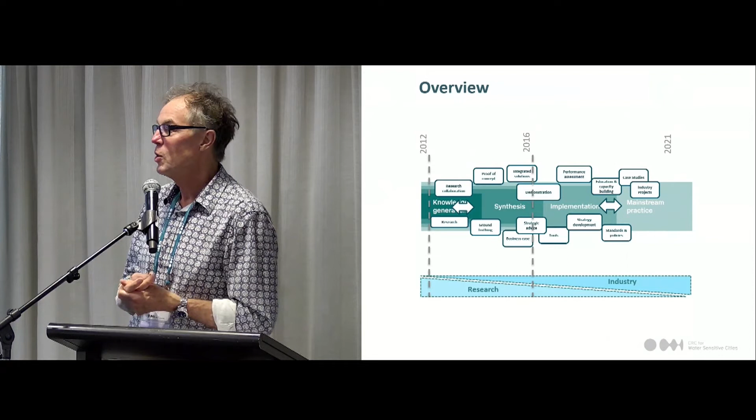There's also a whole bunch of others I won't go into in detail, but I'll just briefly mention them so you get a feel for the things you're not hearing about today. We did some work for Queensland Reconstruction Authority with a synthesis report called Ideas for Catalysing Flood Resilience, done in conjunction with James Davidson. There were two outputs from that: this report with ideas about how we catalyse flood resilience, and also the guidelines that James produced for how you build flood resilience into residential houses. Some tremendous work there.

The ideas work needs to be taken further forward, and that's part of what Pete's doing now with the flood community of practice and other forums. And of course that work of James Davidson has been bedded into a lot of what Brisbane City Council does now, but also in other jurisdictions. So a great piece of work.

We did a review of how well bio-retention filters are working. There were a few myths floating around about that, with some contrary opinions. I think we've answered the questions that were being thrown up there and given us confidence in that technology and in the continuing use of bio-retention filters. So that was a great piece of work. I was really pleased to chair a panel of some great people who helped with that.

We worked with Urban Utilities and Brisbane City Council on risk-based planning, all around how we manage wet weather sewage overflows. Again, a tremendous piece of work, and I'm pleased to hear that that's being taken forward by both those organisations.

We worked hard, I think with the Queensland Regional Planning Group at DSDMIP, on the SEQ Transitions project. It was one of the action items under the regional plan. Whilst that piece of work struggled with traction, I think the mantle to some extent has been grasped by Seqwater and their partner panel, all the SEQ utilities, and that's what we're going to hear about from Wayne.

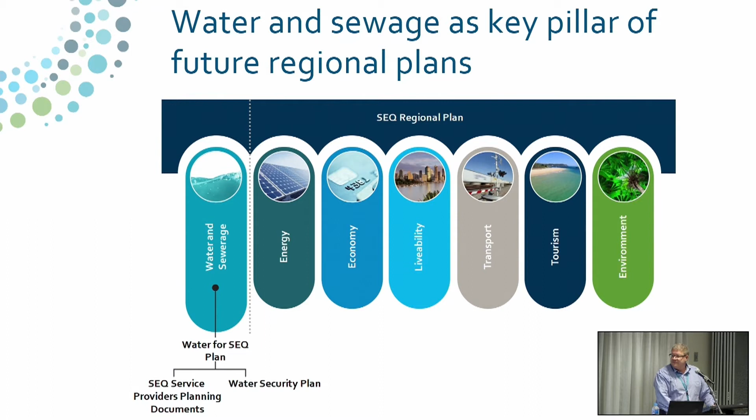And I guess there is a real focus around improved environmental and wellbeing outcomes through this collaborative planning, and that would extend to catchments as well. So as I said before, that's what we would love to see. We would love to see water and sewerage as a recognised pillar in the regional plan moving forward, that we understand how water fits in terms of providing livable communities, in terms of underpinning some of the goals and objectives of the regional plan around prosperity and well-being.

So when we came up with the need, I think we were all very much on board for the need, but we said, what does our vision want to be? We wanted it to be relevant for the entire region, not a Brisbane urban, dense urban type strategy. This is a vision for the entire region across both the built and the natural environments. We wanted it to be bold and fresh, a new way.

That it manages all water resources in a way that we can demonstrate benefits, long-term benefits, both from an environmental or an economic perspective, whatever way we're assessing those benefits, that we have a very credible and robust way of demonstrating those. That the vision's driven by an aligned set of objectives. It does consider the whole water cycle. Importantly, that it's adaptable, that it aligns with land use planning.

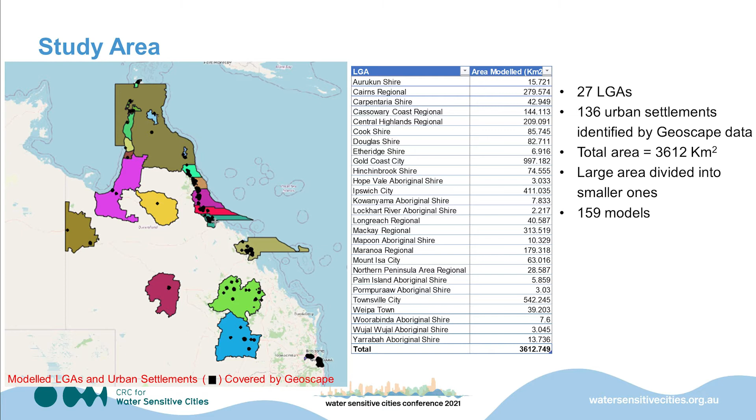So I'm not going to talk too much about it here, but the TARGET model is an urban heat island model, and it uses meteorological forces to calculate the air temperature at the neighborhood to precinct scale.

In TARGET model, ambient temperature is the most important force among others such as humidity, pressure, wind, and radiation. For the climate change scenarios, we extracted the long-term heat wave temperature from 11 downscaled climate models for Queensland. We looked at future heat wave conditions for two emission projections, RCP 4.5 and RCP 8.5, done in 20-year intervals.

To derive the temperature forcing data for the climate change scenarios, for each area we first extracted the 20 hottest 3-day average periods from the nearest BOM temperature station. We then created a unit heat wave profile to mimic the characteristic temperature pattern during a heat wave day.

For any given period, the predicted heat wave peak temperature from the 11 downscaled climate models had very large variations. As such, we picked the 75th, 90th, and 100th percentile heat wave peak temperature from the 11 models. The 100th percentile is effectively the worst heat wave peak temperature.

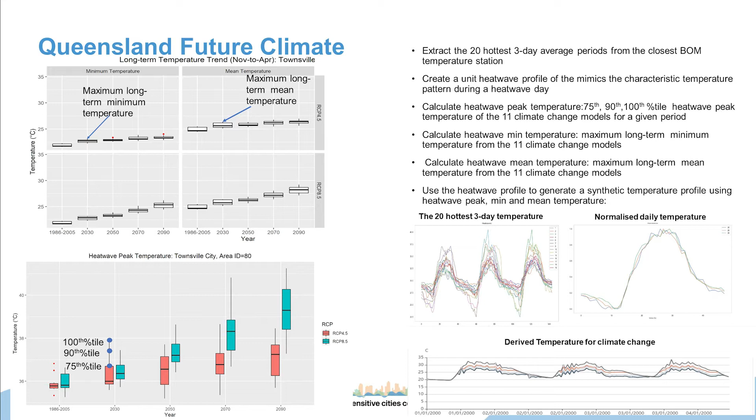For each model, we had 30 scenarios to simulate, and a total of more than 4,700 simulations. The total size of the model results was about 350 gigabytes. We had to aggregate the results to the 27 LGAs in the end. You probably can imagine how much work and how tedious it was.

From the model setup to post-processing, it could not have been possible without the Scenario Tool API, which I think Christian will be talking about in another session.

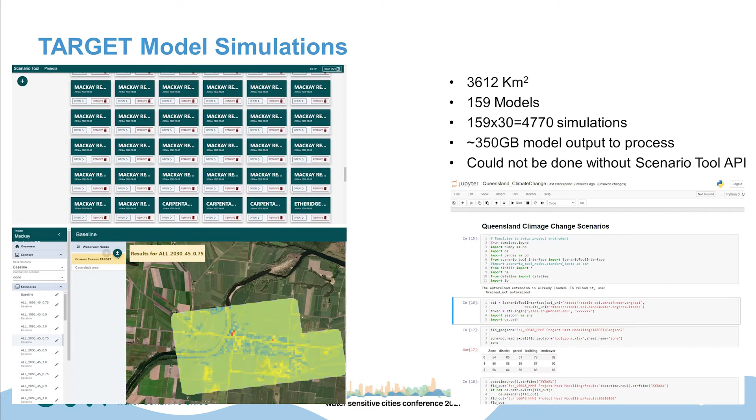Given this is meant to be a very short presentation, I will only use Cairns as an example for the model outputs. But before we do that, I'd like to quickly introduce the Universal Thermal Climate Index, UTCI.

It covers both heat stress and cold stress, but cold stress is not quite relevant to us in this case. Target uses UTCI to determine the impact of a heat wave. It is a measure of how the human body feels the ambient temperature.

It is affected by the actual air temperature, radiation, humidity, and wind. For example, you feel warm on sunny winter days. You may experience more heat stress in a humid environment, even if the actual temperature is not that high.

On the right-hand side of the screen, you will see the predicted change in UTCI distribution over time in the Cairns region. The areas under each curve represent what portion of the region falls within a heat stress category.

These plots are the worst scenarios for RCP 4.5 and 8.5. For example, in 1995, about 90% of Cairns could be classified as a strong heat high in a typical heatwave event. The curves shift gradually towards higher heat stress categories over the next 100 years.

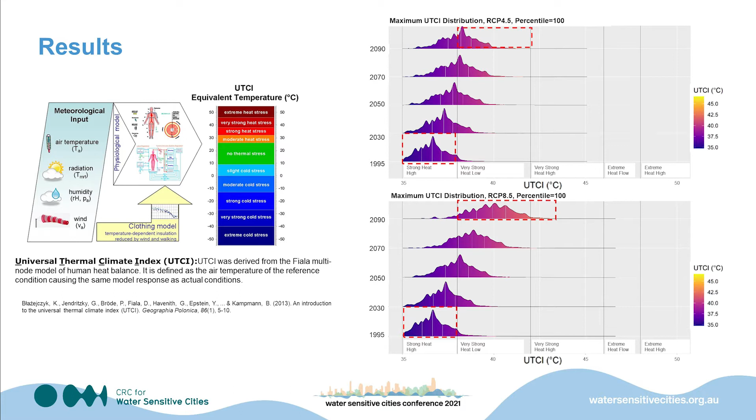The Department of Environment and Science is still working on translating the model results into heat management strategy, which is something we hopefully will see in the near future.

To summarize, we have used the Scenario Tool to evaluate extreme heat hazard for a very large area. This couldn't have been done without the Scenario Tool API. Scenario Tool is able to predict future heatwave conditions under climate change scenarios using the UTCI as a more meaningful metric for human health impacts.

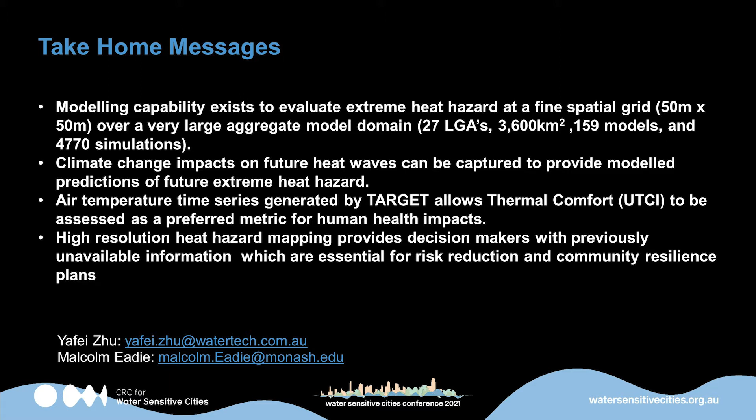Thank you, Yafei. Greatly appreciated. I think we are beginning to get a message now. It's going to get warmer.

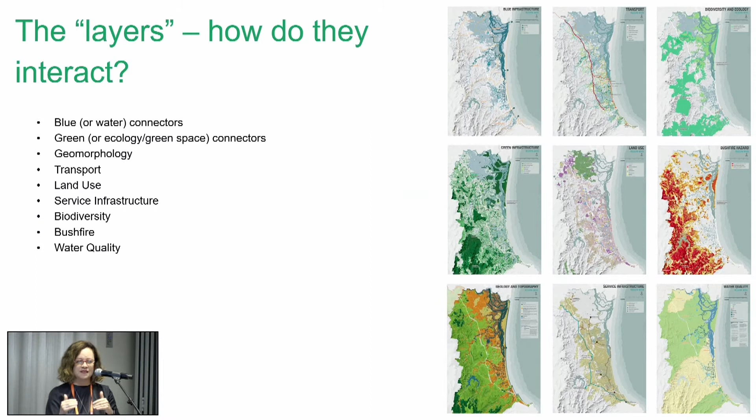It was incredibly important that we understand how all of the existing systems in the city interact, so we did quite a lot of detailed mapping. I find this kind of stuff very useful - you can almost squint your eyes and see the big structural elements driving the shape of the city. The Gold Coast city is a set of linear villages with a broken green and blue network that moves across it. That's a very simple characterisation of a very complex set of circumstances, but it helps you think about what's the shape in the future.

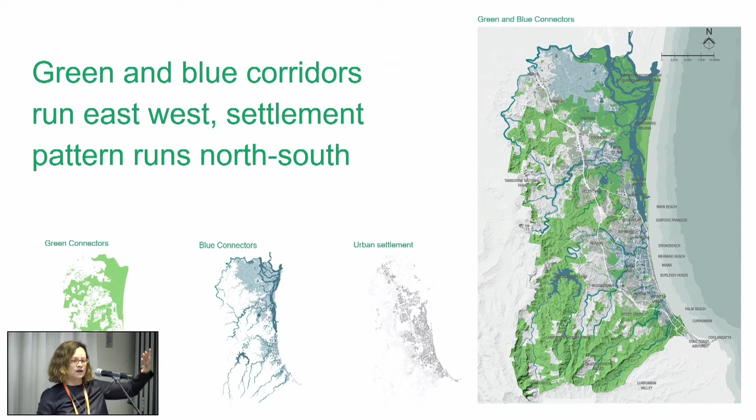So that became our foundation for how we needed to think about the ultimate shape of the city, and then work back to all the pieces we could achieve over coming years to form the framework. We've got the settlement pattern on one hand and the blue and green corridors travelling east-west on the other. That led to the very simple idea that planners and architects in Gold Coast had been tossing around for a while, which we really jumped on - this notion of an urban ladder. In order to create a more sustainable ecological structure for the city, we really needed to think about this notion of a blue-green ladder that crisscrossed the linear corridor of the Gold Coast.

So that became a key anchoring idea for this spatial framework that we could build on. It's all very well to have long-term goals, but unless they resonate with what's actually happening on the ground now, it's going to be a lot harder to get there.

So we spent quite some effort mapping the current projects Gold Coast had on their books across all of those 5 areas in terms of planning, infrastructure, sewerage and transport, and found that in each project there was an opportunity for us to intervene and affect the water-sensitive outcomes. Some of them were longer ranging, some were about to be implemented, but that also gave shape to the strategy. So it was a combination of that long-term structural idea combined with the opportunities right now, bringing these together.

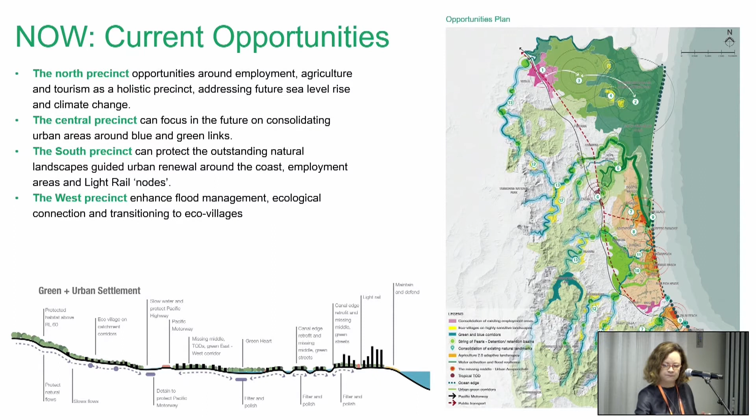So that gave rise to our final, our ultimate spatial map, which is really something that brings together our opportunities, our best practice, and then the ultimate shape of the city we were looking for, which was about this ladder of blue-green corridors connecting to and crisscrossing across the primary north-south settlement pattern.

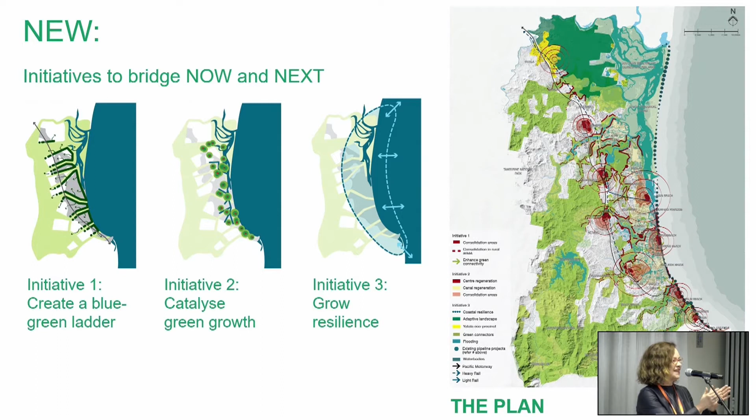To achieve that ultimate shape across those dimensions of time, we developed 3 key initiatives and grouped all of the actions under these 3 key initiatives. The first is we actually had to create and rebuild this blue-green ladder because it was very broken and fractured, and we needed to embed that firmly in the urban footprint and structure of the city. Secondly, we needed to catalyse green growth within that corridor to find the opportunities short term to build those connections wherever we could.

And thirdly, coming back to the big climate change challenges of a city like the Gold Coast on the water, we needed to develop a longer term strategy for protecting this structure and the city itself.

So I'm just going to take you for a walk, a high-level summary of the main strategies around those 3 key initiatives. Of course, there's quite a lot of technical content that sits behind each one of them, but I'm not going to go into any detail—I'm just going to cover off on the main ideas and strategies.

So the first initiative, rebuilding this blue-green ladder, we needed to focus on mending those ecological links and the ecological and water health. Very carefully framing urban consolidation around that to shape new growth areas, and then really using those blue-green links as meaningful community resources so that they remained in the urban structure over time.

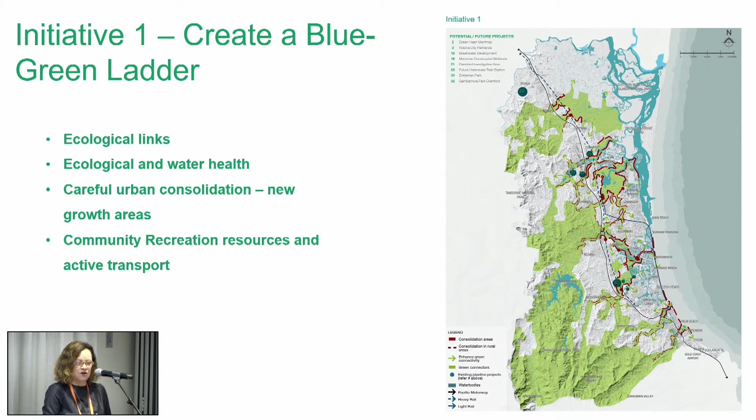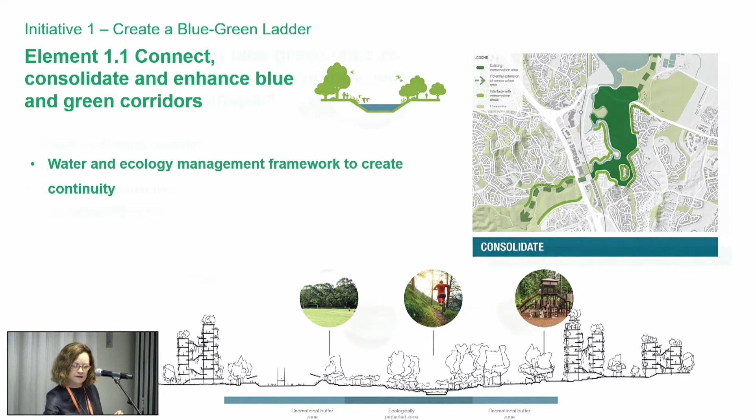So we drilled down into each one of those, identified areas where we could rebuild those urban links, those ecological and water links that would mend the network. And then we mapped and identified areas where we could create new active transport and new community recreation links to really inscribe those meaningful spaces within the city over the long term.

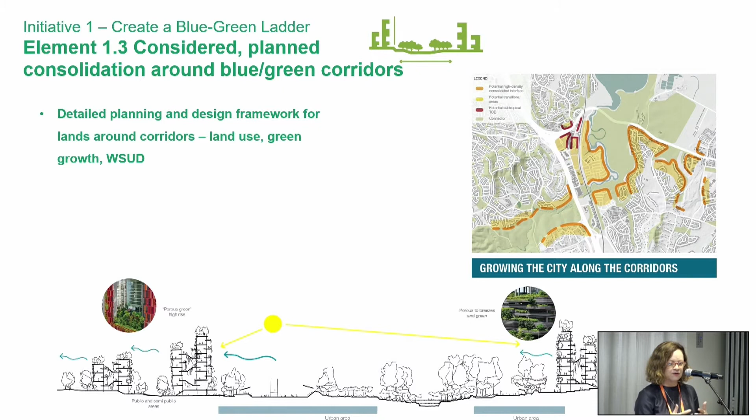Then, very carefully, look at wrapping consolidated areas to frame these ecological links, partly to bake them into the city, but also to look at that reshaped structure of the city over the long period and say, let's actually make this experience of green, of water, and connection to nature and ecology still part of what it means to live on the Gold Coast, but orient that in a different way. Of course, this has to be done incredibly carefully with a lot of control and consideration, but that's the high-level strategy.

So the second initiative was to go back out of the hinterland and those green links and look at the fabric that exists in the Gold Coast at the moment, and really try to find the opportunities to create green infill, retrofit streetscapes, and look at small pocket water regeneration projects.

And the elements of that were within some centres planning that the city was doing. So this was more about the low-hanging fruit and trying to influence what the city's doing currently. There were a number of urban growth infill areas they'd identified, and the framework comes in and says, well, here's some approaches that bring water and water-sensitive city shaping to the fore in those projects you're already doing.

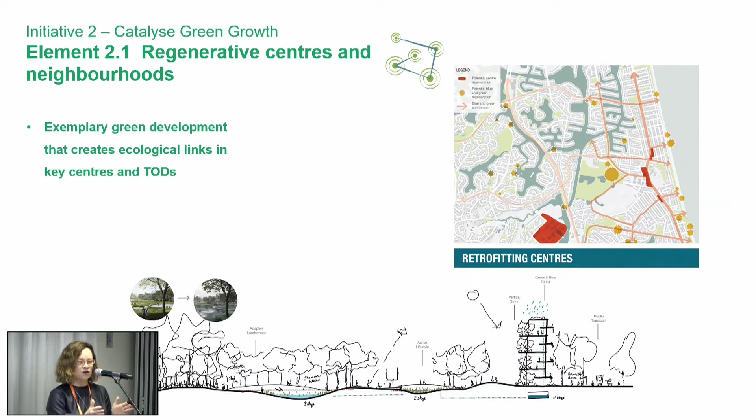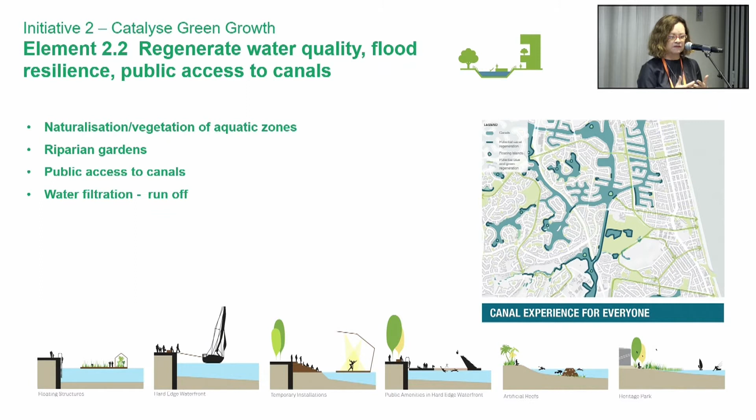Of course, Gold Coast canals are going to continue to be an issue for that city over a longer period, and the water quality in those was something we felt we could directly improve and intervene in, as well as increase public access to and enjoyment of some of those canal spaces as well.

And secondly, things like streetscape, public realm, water-sensitive urban design, smaller scale parks around the edges of the canal, exemplary green development in those existing urban areas—so a suite of strategies throughout that existing footprint area.

And then thirdly, the longer term one about growing resilience. Of course the city is incredibly vulnerable to sea level rise and its impacts, soil salinity, heat, severe weather, all of those above. And I guess we were very interested in saying, if we have a framework for the city that's about water sensitivity and ecological health, we really need one that's about a similarly holistic framework for climate change.

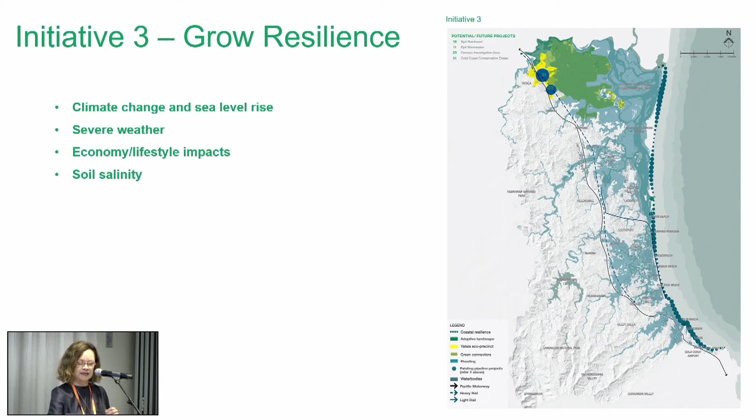There were some strategies, but we were really promoting the idea that it needed to be a completely integrated interdisciplinary strategy, particularly focusing on the coastal areas and vulnerable coastal areas, but also in a couple of key vulnerable areas around the Yatala precinct. This was an incredible opportunity to rethink how that area, which has a lot of agriculture, industry, and Ramsar wetland, is an absolute crucible for all the big impacts of climate change over time, taking a comprehensive master plan approach as a longer term project.

So there you go, whistle-stop tour of the Gold Coast Water City Design Strategy. I think Maryam had some closing comments. Maybe not. Any questions? I'll leave it to questions if there are any.

We have a question here online, if I can start it. It says: what support other than money do they need from the Queensland government to implement this ambitious strategy? For instance, policy reform. And that was a question for Maryam.

Great question. For us to be able to start such a project, one thing I forgot to mention is we brought together, for the first time in the city, each player from each directorate. This was a combination of a group called Enablers for shaping the city, and the representatives were the managers or executives in charge of planning for that aspect of the city. Huge, biggest step. But the thing that's missing is the policy setting and the scheme at a Queensland level. So it's up to each city to see how they can push this thinking forward. If we had that strategic thinking from the state level or national level, things would have been much easier for us. Then we had to do it, not can do it or maybe do it, if that makes sense.

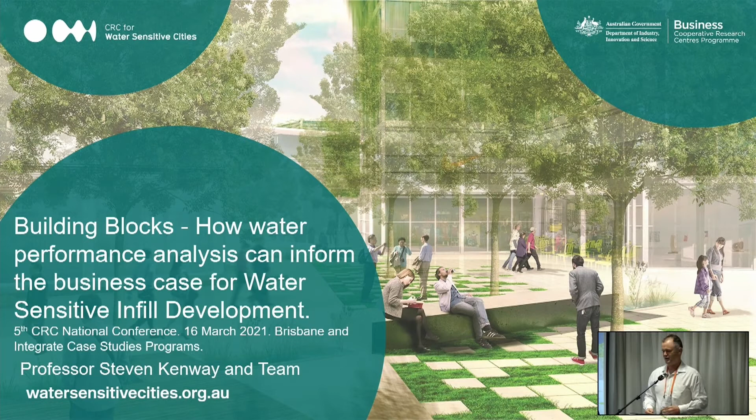The focus of today's session evolved a little bit from tools and case studies, and we've got another session on case studies this afternoon. So I've got a blended presentation that I'll give half now and half with more focus on the detail of the case study. My understanding is that this presentation really focuses on the building blocks of what happened in some of the integrated projects, and I can talk particularly about Integrated Research Project number 4, which is about infill development.

Firstly, I wanted to acknowledge the team. There were 4 universities: University of Queensland, Monash, UWA, and Melbourne University that contributed to this project. Professor Nigel Bertram headed up the architects together with Professor Geoffrey London, and we had a water performance team at the University of Queensland. Kerry Nice, one of Nigel Tapper's postdocs, did most of the urban heat and microclimate work—Nigel will be presenting shortly on the urban design components. We also had a fantastic steering committee that stuck with us the whole way through for 3 years, chaired by Melissa Bradley, who's an absolute champion of enthusiasm.

Perhaps not surprisingly, and partly due to the drive coming from South Australia, Salisbury in Adelaide emerged as a case study for us after we looked at and screened 15 potential case studies.

In summary, this presentation will focus on what water performance analysis is and the tools we've used around that, how we developed and applied it in the IRP4 project, and a little on the business case, and how it can inform the broader business case, because many of the integrated case studies are heading in that direction. I'll also point to where more information can be found.

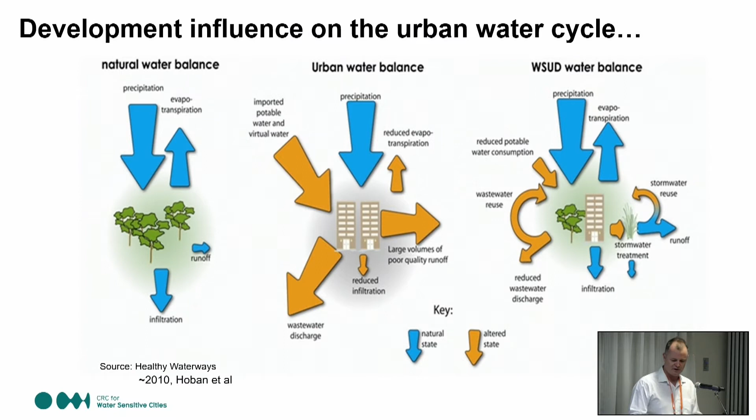If I summarise the aim of the IRP4 project, we're not starting completely with pervious catchments—we're starting with the existing case, which might have a small number of households, that is moving to be more urbanised in future, shifting those ratios and flows of arrows. But how can we make our cities have closer to natural stormwater, closer to natural infiltration, reduce dependency on centralised water demand, and reduce wastewater flows, and improve livability? That's, I guess, a grand challenge for our cities and urban design.

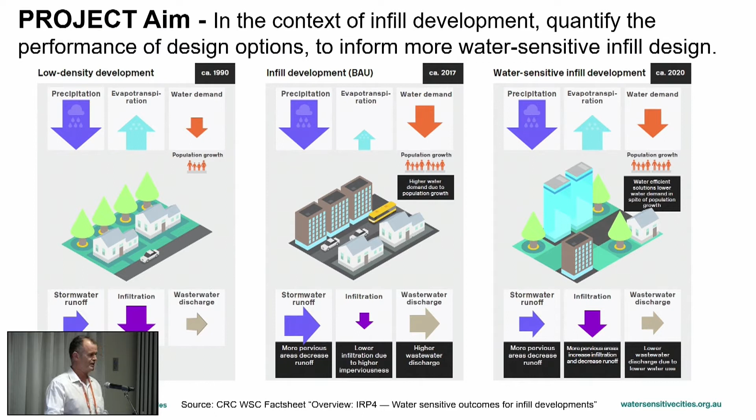And we can think of that at a range of scales, from the site scale to the precinct scale to the entire city. So in brief, the way the IRP4 project developed, it had three main components, as I mentioned. It had the urban design, where the architectural team—and you'll hear significantly from Nigel Bertram—looked at simplified 3D schematics.

We didn't need to know where windows and doors went, but we needed to know where impervious surfaces, where three-dimensional volumes, where water would be stored, where there was green space, and what the different vegetation types were. So through the Progress project and their previous project, they developed simplified architectural representations of dwellings, apartments, or streetscapes. Streetscapes keep coming up as a major network of impervious surface, owned in the public realm, so it can be part of the solution. We need to consider the fraction of road space included in different designs and developments.

We coupled that with a systematic water mass balance to interrogate and analyse each of the typologies, both at site scale and ultimately at precinct scale, for different performance criteria.

I just briefly want to describe water mass balance, which is a key method underpinning the science of metabolism. It still uses a supply-demand balance—a lot of people think of water balance as supply equals demand, and we always need to ensure people can have water when they need it. But importantly, mass balance actually works on a three-dimensional volume.

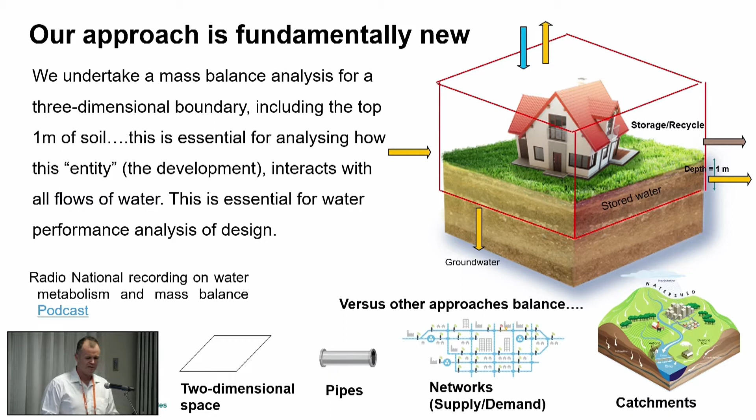So to bring those concepts together into a site—much of the development we see is one block being split into two, three, or four. Bringing together the simplified architectural representation and the mass flow diagrams, we're asking: how do we assess the performance of this entity, the house, as a three-dimensional volume, including its share of the road space?

Going back to the business case and this mass balance figure, those flows ultimately influence the demand for centralised water infrastructure, the rate we have to shift towards new desalination plants, and the rate we have to upgrade water pipes and wastewater discharges. By looking at increased volumes of stormwater, we use that as a surrogate for water quality, because larger volumes of stormwater export more sediment and nutrients.

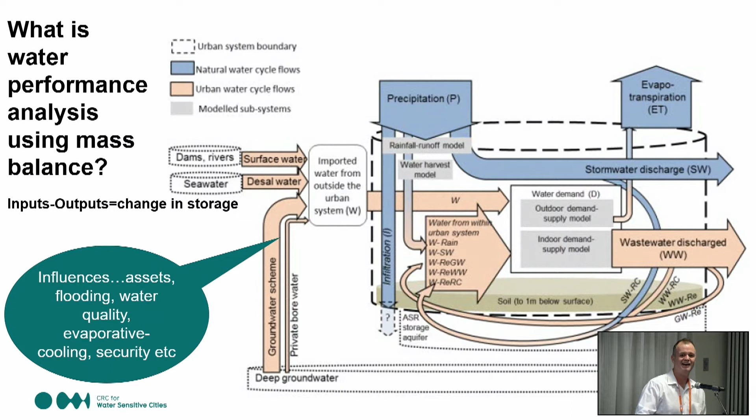Shifts in evapotranspiration impact urban cooling. How many minutes have I got left, roughly? Does anyone mind telling me, just so I don't go over? Okay, great, thank you, perfect.

I apologise for the small font. We're about to publish the final report, and we'd hope it would be on the website—it's days away, we've got the cover I can show you. In the report, we've got the methodology and the different tools we used to screen different typologies and ultimately precincts, enabling retrospective assessment of design, and communication built with the architectural team so they'd give us parameters on land area, impervious surface, volume stored, etc.

And we'd give them back the performance indicators and say, why is that high, why is that low? And let the design iterate.

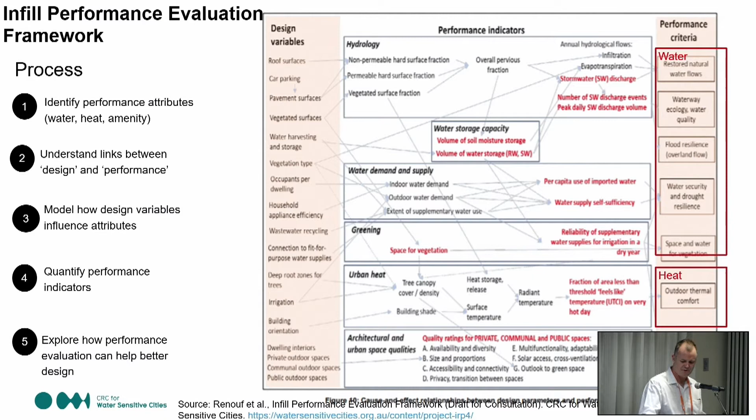And so we can use this framework to say, well, look, if we really want to improve heat or reduce flooding, follow it back in a cause and effect diagram to ultimately connect the design and the architecture. That performance framework is coded in the tools.

And so the site scale urban water mass balance model, which we've called SUWMBA, trying to keep in the CRC theme of music-oriented tools. It actually incorporates many of the MUSIC daily water balance algorithms in the Visual Basic of Excel. It incorporates land surfaces, water demand, imported water, the water breakdown from centralised and decentralised systems, and most importantly, and quite differently, puts out the performance indicators in a very simple, easy to use way.

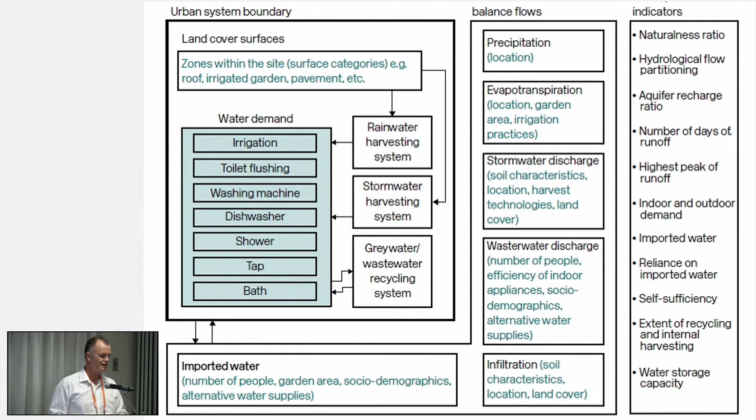That's published and released by the CRC as a downloadable free Excel sheet and user manual. It's also discussed in the evaluation framework.

So the evaluation framework's been on the website for 9 or 12 months now, which runs through how do we use the various components of the project, how do we define the infill area. And it turns out actually defining the system that we're evaluating is one of the hardest steps, particularly at that interface of site scale and precinct scale.

It's kind of easy when we know the urban footprint of a city, but this interface of what's the site, at the size, sort of between 1 and 5 hectares and maybe 5 buildings or 100 people, and a precinct - a lot of ambiguity, a lot of different opinions between disciplines, etc., nationally on that. Defining the parameters, selecting the performance criteria, and then actually assessing the performance.

So in the interest of time, I'm going to skip over the case study detail because we'll be presenting that more in the afternoon. But the final report, which we're producing, articulates very clearly the principles that are intended across both design, water and heat, the criteria for testing that, and the indicators.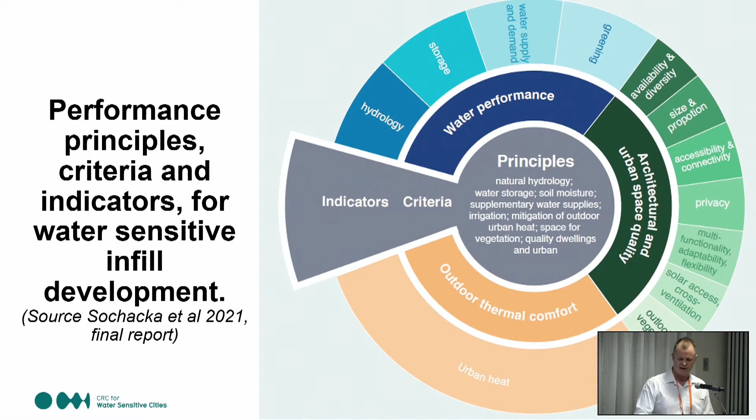We articulate in detail the principles, and I'm just going to skip through this, and if it's of interest, you can join this afternoon. How to plot them consistent, I guess, with the Water Sensitive Cities framework, with good being development meeting the outer bound and less good, like business as usual, being red on the inner bound.

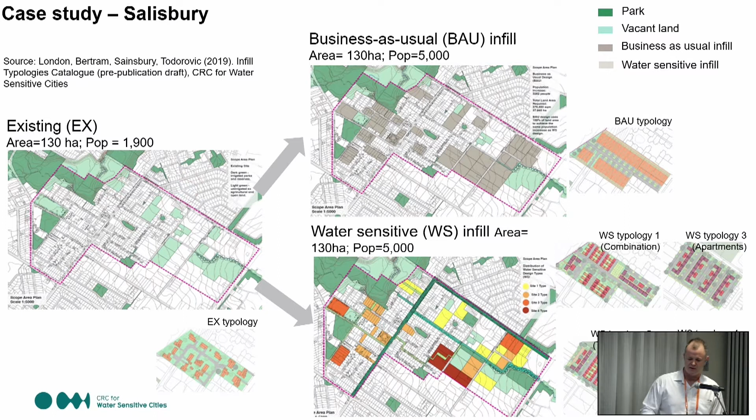We stepped through the case studies, how we actually developed and designed with the team to move from the existing case of 1,900 people in Salisbury, for example, through business as usual, 5,000, or conservative water sensitive with 5,000, or water sensitive maximum with 11,000 people, and what sort of water performance you could achieve with different design.

So I won't run through all of that, other than to say that water sensitive, even water sensitive max, with double the business as usual population, can have less stormwater flow, with harvesting of rainwater and stormwater can also dramatically reduce demand on the centralised system.

It can be much more water self-sufficient. The more you're harvesting and storing it locally, not exporting it downstream, it can contribute to local water security. And we've got good data, good details on each of the 2 case studies, which I'll run through this afternoon.

I apologise for flicking through, but briefly, we did these 2 quite different case studies. One in Salisbury, South Australia, which is a very low socioeconomic community, and part of the rationale there was very dry. They've been very progressive in stormwater harvesting for some time.

So if we could make water sensitive development work in that particularly challenging environment, then it has a lot of representativity elsewhere. Knutsford in Western Australia is more the top 10%, driven by the state development of Western Australia. And then a sort of partial case study, an integrated water study together with Brisbane City Council, which used some of the outcomes more in a local overland flow context.

We'll talk more about them this afternoon. So to conclude, the key message is that our cities are not currently well designed from a water sense. We can show very clearly how wasteful they are, and a lot of the first 3 years of our work with the CRC and the second tranche looked at that. They're very hydrologically wasteful and damaging. Systematic performance assessment across the natural, piped, centralised and decentralised systems quantifies the impacts and enables a much more complete and full business case. That was part of the topic of the integrated case studies this morning.

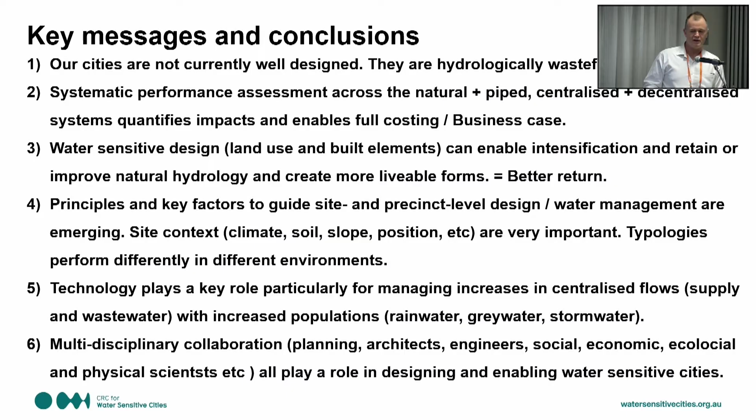So for more information, if you go to the CRC website, the 5 main industry-oriented publications are the evaluation framework, the typologies catalogue, the application of case studies in Salisbury and Knutsford. We've got the site scale tool, the AquaCycle tool with its user manual already published that we use at the site scale. At the precinct scale, we use a different tool. And the final report, which I can show you the cover, but you can't quite have yet.

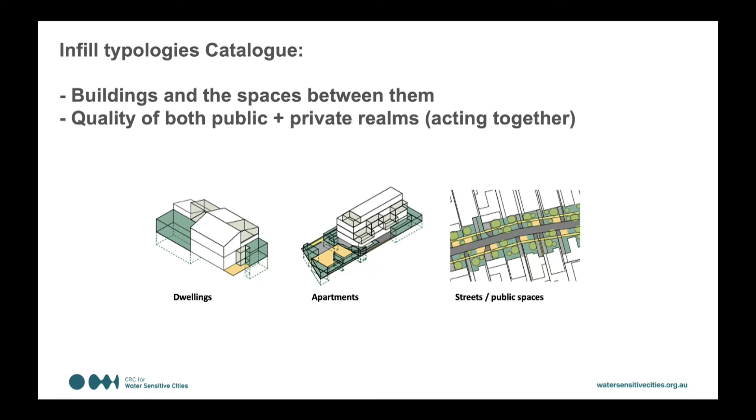So the catalogue is filled up with examples of designs that we know work. Often built development is understood in a very abstract way, like in terms of setbacks and height and plot ratio and these kind of things. But we wanted to start with the room and the garden and the courtyard and the tree, so that we can understand that the buildings we're testing are actually performing at an interior level to maximise the livability and the efficient use of space.

Here's an example of a small terrace house in Salisbury, a 3-bedroom house with a flexible ground floor home office. It's got a covered garage that links directly to a courtyard. The courtyard is well dimensioned, 4.5 metres wide, and directly opposite a north-facing living room. There's enough space for bathrooms, kitchens, laundries, and all the internal divisions are flexible.

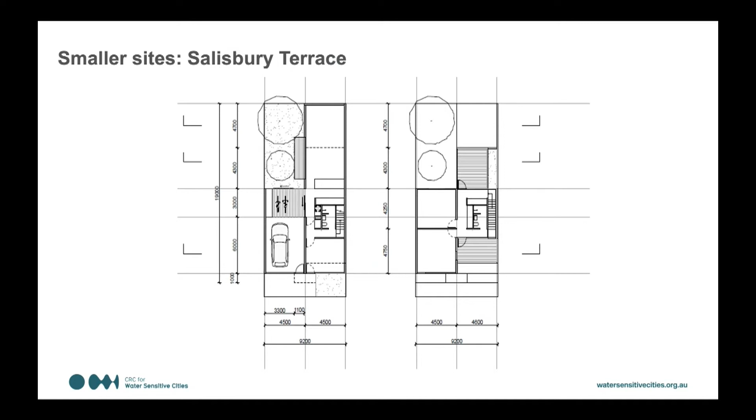This is an example of a kind of unit that, in this case, is on a 180 square metre block. We can then understand how that unit repeats at scale. If you had 3 or 4 of them in a row, what's it like? Does everyone still get their amenity, and can you plant real trees in the spaces? They're based on built precedent.

I'll explain how that was applied to a test case study in Norman Creek, aimed at the problem of urban infill in middle suburbs in Brisbane generally. As you can see from this area, the catchment boundary is in pink, and there's an overland flow path running right through the middle of a lot of private and public realm sites. Within that, another typical Brisbane condition is a lot of pre-1946 Queenslander style raised timber houses, shown in grey. We considered these were not going to be developed in this scenario, so only the beige coloured ones were available development sites.

As Steve mentioned, the typical business-as-usual development applications at the time BCC gave us were like this, where a single house turns into 3 dwellings, and the garden goes down to 20 or 21% from 70%. Or here on a corner site, a single dwelling goes into 5 or 6 dwellings, units, townhouses generally, and the green space is again down at 20 to 22%, in very thin strips around the perimeter of the site, not so effective for big trees as you can see in the old backyards.

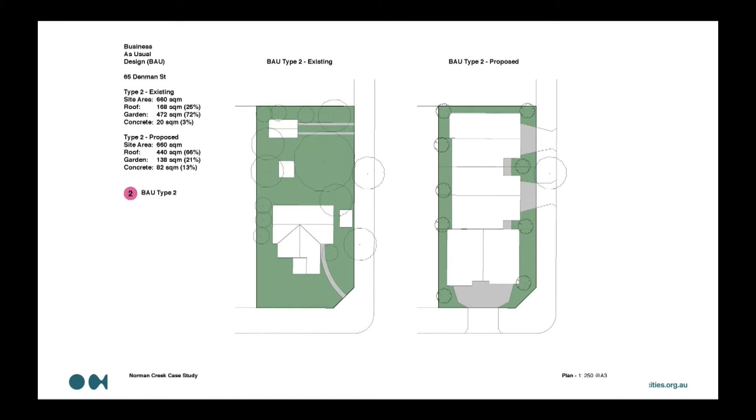We know that especially in Brisbane, or actually everywhere, the tree canopy is really important for microclimate around buildings and the general urban heat and amenity of our suburbs, particularly with climate change and an ageing population.

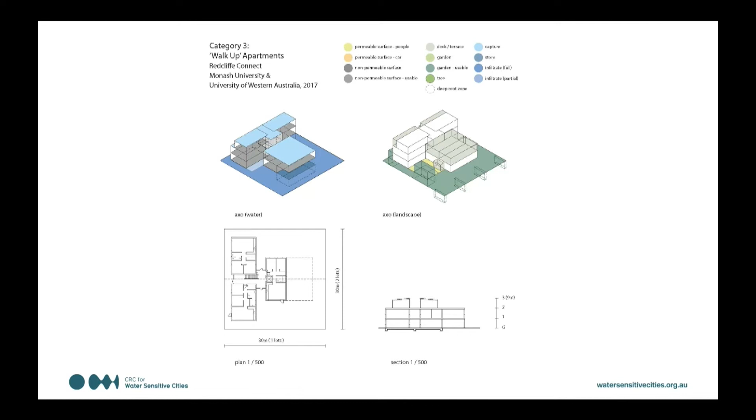So we took some different typologies from the catalogue that were designed for elsewhere and modified them to what we thought would be appropriate. This one is a 2 to 3 level walk-up apartment building with an elevator on each core, so it's fully accessible, and it's low height, so we knew it would fit infill situations. On a site, it gets high density over 2 to 3 levels, but because the cars are separate from the dwellings, we can get the garden doubling from the business-as-usual development, even though the yield is higher. We had 43% garden area, with permeable paving and so on.

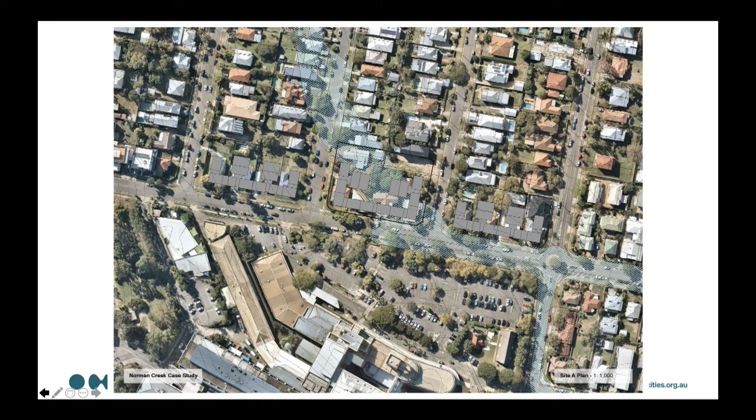We applied this model to a series of sites opposite the hospital in Norman Creek, shown in grey, one or a couple of which have the flood path hatched in blue crossing through them. These sites were part of an urban design framework with a higher density strip and a new public green street opposite the hospital. The 2 to 3 level height was within the planning constraints, and we thought of it as a test.

We applied those sites to the model, and where the overland flow path crossed the sites, which were already developed private land, we modified the typologies to remove the ground floor so no dwellings were within the flood path. This enabled good pedestrian connection diagonally from the street corner through to the large courtyard and beyond. We thought this could also engender a mixed-use type where maybe on the ground level allied health type functions might exist, with living above, opposite the hospital. It would all work quite well.

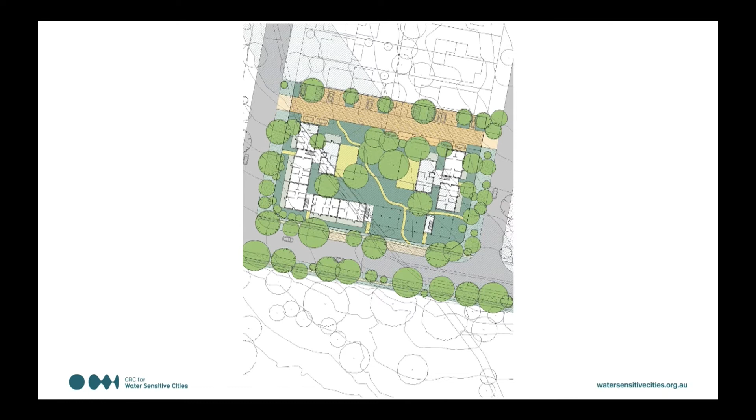You can see in the section that the central courtyard allows for much bigger trees. We can have the water and the natural creekway, which is the low point of the topography, hosting the largest trees, which is a natural condition, and the buildings are set around those landscape spaces.

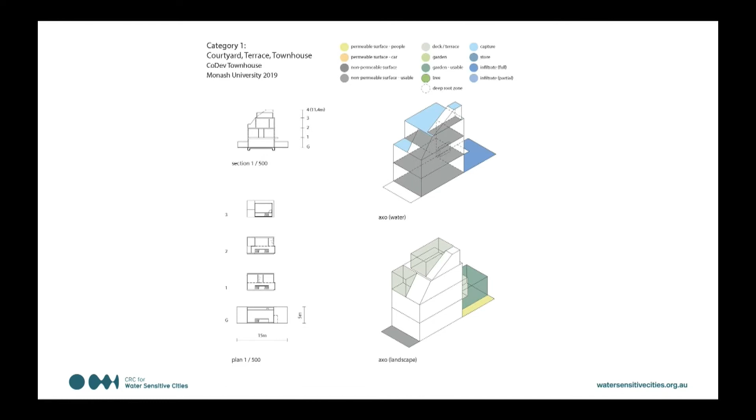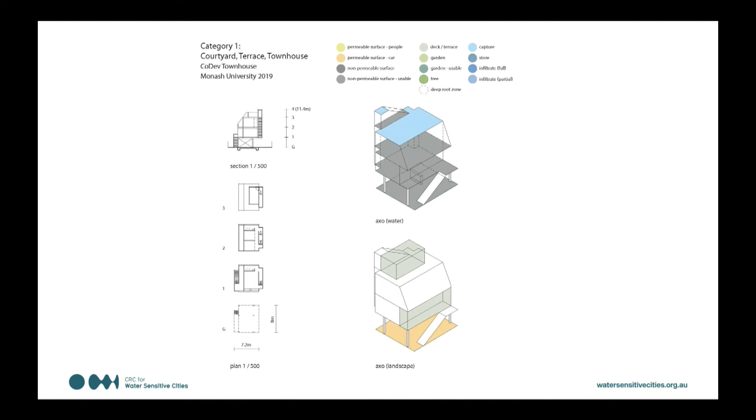The second example is we took some townhouse types, 3-bedroom, 3-level townhouses, and a kind of 2-level with a rooftop elevated townhouse that we designed for projects in Melbourne. We knew that the overall efficiency of the dwelling was high and the amenity of each level worked, and we thought these would be applicable to other sites in our study area.

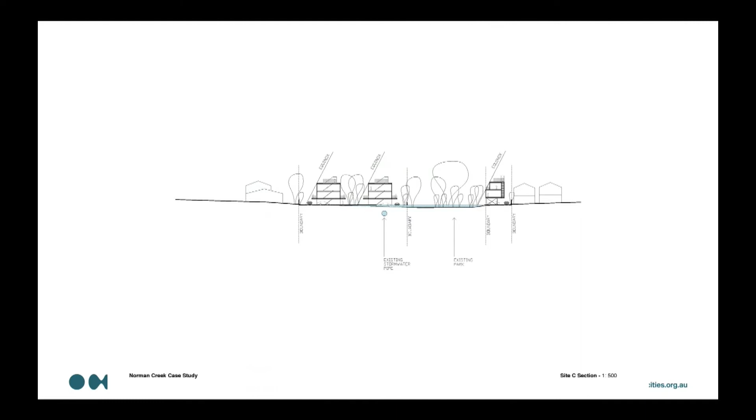In section, you can see there was a small piece of public land next to the road, which has large trees, and we borrow the amenity of this public space to support high quality infill, with buildings well spaced apart, tight footprint buildings that have all their habitable levels well above the water plane, and allow for parking and storage at the ground level. Importantly, those parking areas are designed as mixed-use workshop type spaces.

So the total package is what's important, and that requires the buildings to have an efficient spatial footprint that can be multiplied and oriented in respect to public realm possibilities.

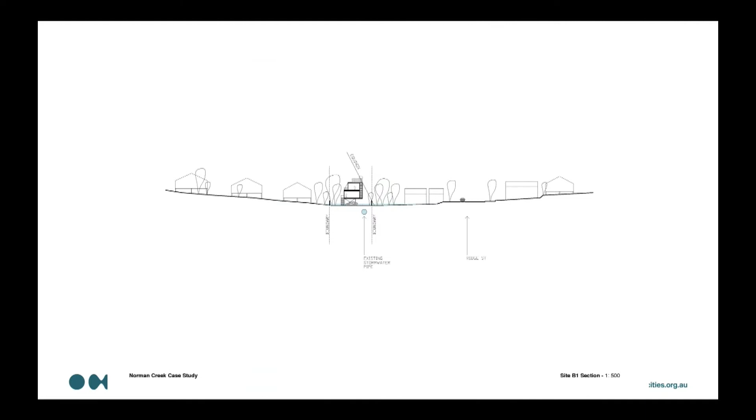Those same typologies were applied in different sites, and we utilised the fairly vertical character of the Brisbane suburb and the Brisbane trees to allow raised, elevated type buildings that went up to 3 levels, but still could have numerous green spaces around them, so that privacy is moderated, also taking into account the surrounding buildings are already quite high. In other areas, the heritage areas, the development is much more modest.

If anything, it's either retained as the existing building, or where the flood path crosses, maybe a relocation of that building on the site, or a redesign of it so that it could be a dividable house where 2 smaller apartments could exist under the one hip roof.

So all of that meant that we can think of the infill precinct as, first of all, being partial - it's never 100% coverage. In this case, the pre-1946 sites were largely excluded. It's also diverse - you can see the different colours represent the different building types, from apartments to townhouses to detached dwellings.

The distribution of those different types is in response to other urban design criteria, and where mixed-use retail and so forth and apartments might be. So it's diverse, it's incomplete, it's in support of a larger environmental public realm idea, which is connectivity of green space, increasing the tree canopy along the natural watercourse, and giving space for water to move.

It's also very efficient, in that the total yield that comes out of this development is well above the target infill targets of the BCC. So here we had an increase of 2,000 people within this precinct.

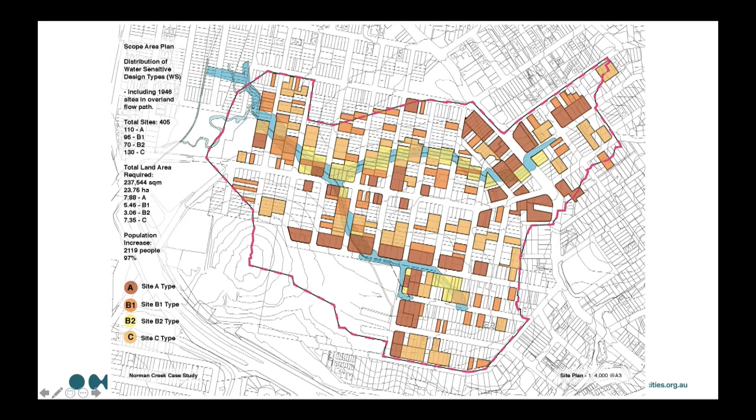So that's... I can work out how to get out of this now.

I hope that made sense, and I'd be happy to take any questions, and I hope the technology worked.

Thanks, Nigel. It did work. I wonder if you can hear me now? Yes, yes. Oh, good. Does anyone have a question for Nigel? Because we're running a little short on time. So while Nigel is still online, anybody? No? Everybody's a little bit shy.

So there's general comments here, Nigel, that excellent work. Everyone really enjoyed your presentation. Steve had a question down the end there. Steve Kenway's got a question, maybe for me. I can... Yeah, I know. I'm not sure whether this is a stitch up. No, probably come here.

Nigel, comparing across the case study work that we've done, because this group just saw a presentation on Salisbury and a glimpse of what we did in Western Australia, and you presented the Norman Creek example here. How would you describe briefly the biggest challenge of the differences of those 3 different environments?

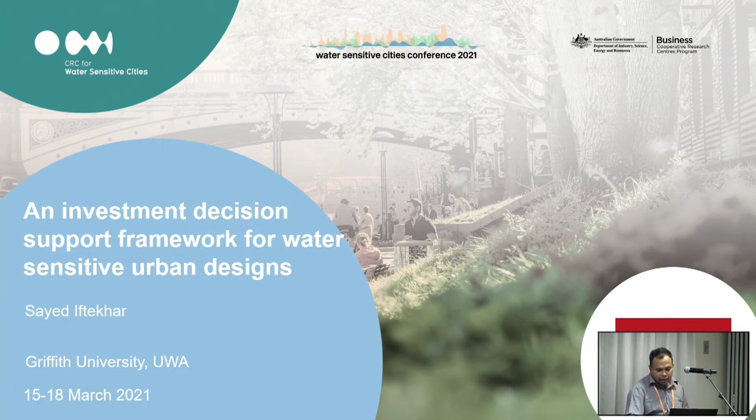That's why when the Productivity Commission conducted a comprehensive review last year, published last year though the review was going on for a few years, they identified 2 implementation challenges in this space.

First of all, there is a lack of transparent and rigorous assessment of the options using cost-benefit analysis. Often, people relied on cost-effectiveness analysis or a financial kind of benefit-cost analysis. They did not go through all the way. So that's obviously a lacking they have identified. And second, in absence of these robust processes, the decisions have not always been informed by the relative net benefits of different options.

So these are key implementation challenges that the CRC, especially the Economic Evaluation Project, have been working on for the last 6 or 7 years. What we developed is a comprehensive benefit cost assessment framework, and secondly, the data and methodology for capturing the intangible benefits or non-market benefits of these kinds of projects.

Intangible benefits are like externalities, something that's often not easy to measure in an economic sense. For example, if we install a rain garden, it has a water quality benefit to the local waterways. It might have benefits to local fish, biodiversity, the water might look good. What is the price? How can we assign a dollar value to that? Otherwise, if we cannot do that, we have an unbalanced balance sheet - costs and benefits don't weigh up.

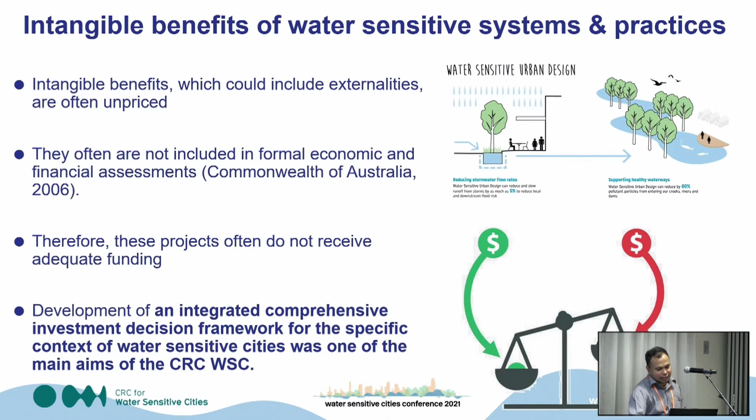There are a couple of elements to these INFFEWS packages. First of all, we recognize that not all of our target audience is going to do benefit cost analysis on their own. Often they will be the procurer, the policymakers, ministers, or someone advising the minister. So they basically need to have an understanding of what goes behind these analyses - that's basically all they need to understand, not much more. How you get the numbers, etc., that's not their job.

So what we did is develop a guideline or report, a CRC report, especially targeting or facilitating this strategic decision making and how this benefit cost analysis or economic framework could be helpful. Secondly, we call it a rough BCA, which has actually been applied in New Zealand as well, and in some other countries. This is basically for when we're sitting around the room doing a workshop, a very quick and dirty way to assess some options - more of a discussion starter kind of tool.

Then we have this comprehensive benefit cost analysis tool, which has its own guidelines, user guide, manuals, and lots of help videos. And then the value tool, or the database I was talking about. There are also training videos, training materials, case study reports, etc. Chris will present as well the application of this INFFEWS tool as we conducted it.

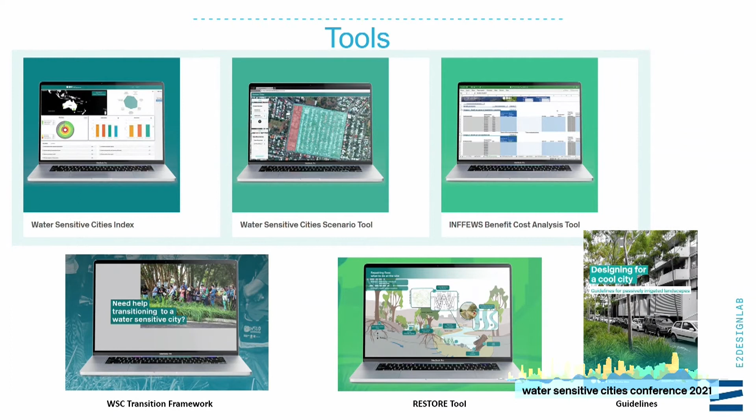When I was looking at the tools, we've been really fortunate in being able to help develop some pilot tools, but then apply them in our day-to-day work. There's quite a few, and I wasn't sure which ones to select, so I actually went out to my team and said, send me through some highlights and some key learnings. So this presentation is really going to be about the insights we've found by using and applying these tools. I won't spend a lot of time on each of these because you've probably heard a lot about them, but I'll be touching on tools that help us see the vision of a water-sensitive city, planning and evaluation tools, and then some implementation.

As Fee mentioned, this Water Sensitive Cities Index benchmarking tool is really so valuable for us in getting the stakeholders together in a room, sharing knowledge and finding out where they're at. Because you can't plan forward without knowing what your starting point is.

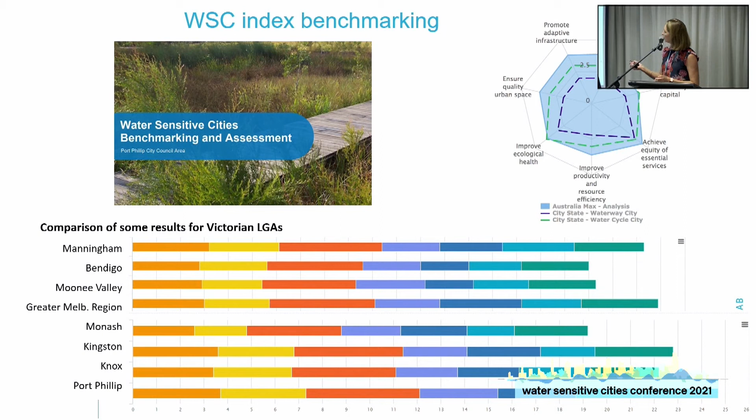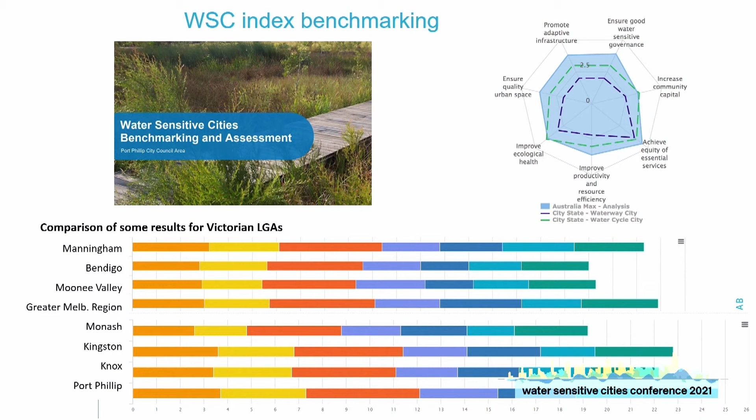We've rolled out the indexing for more than 12 LGAs in Melbourne and some LGAs in other states as well. From doing that, we found that many of the tools and instruments already exist to advance water-sensitive city practices, and the key really is in sharing these resources effectively across organisations. If you have a look at the spider diagram, the combined outcome for Australia, we're actually fairly well progressed. It's just that it doesn't necessarily all sit in one organisation, one LGA, but definitely there's the ability to share that knowledge.

The transitions framework as well has been a useful tool to then say, well, what have you got in your organisation and where are the gaps? As you can see, there's a diversity of how far the enabling factors are progressed within any LGA. But that's really important to know, because it allows for that action planning. It gives those LGAs something tangible, outcomes to be able to progress forward.

On reflection, the Water Sensitive Cities Index has been applied, and we know it can be applied not just in Australia, internationally, but also at a whole range of different scales. While everyone's on a different journey, overall we're actually making pretty good progress, and there's a lot we can learn from each other in doing that.

One of the really valuable outcomes was the importance of having the right people in the room, from across different departments within an LGA and external stakeholders like the utilities. The value of having all of those people in the room to share knowledge and support ongoing conversations and collaboration is one of the great values that comes out of it, let alone your spider diagrams and visualizations. We need to know what our strengths and weaknesses are to be able to progress forward.

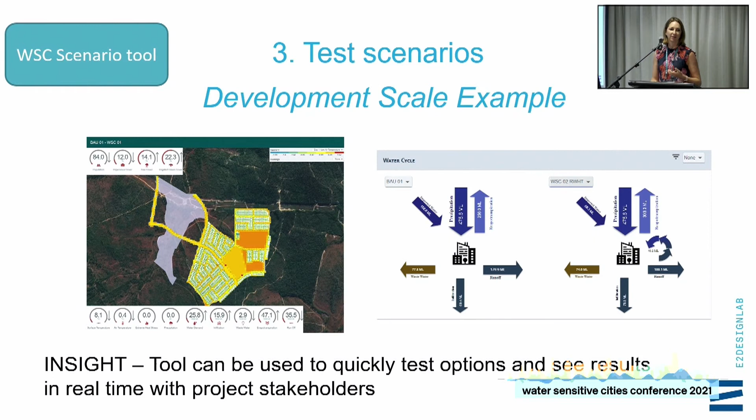How does it change our water balance? How does it change our heat island indicators? You get those stakeholders involved in that decision process, and they get the buy-in as to why certain options will stack up better than others.

Once they decide on an option, we can use this INFFEWS tool, which is fantastic to start putting costs to things we couldn't normally cost. So we're not just talking about potable water savings or the cost to replace a tree, but we can factor in things like the cost of mortality or the benefits of avoided mortality by having cooler, greener, healthier environments.

It also opens up those sometimes difficult conversations around who pays and who benefits. And where there's inequality, looking at different funding models, different ways to overcome that and get these outcomes in a more fair and equitable manner.

Most of the work when you use the INFFEWS tool actually happens before you use the tool. That's again working with stakeholders to understand what benefits are of most interest to them, what benefits they value, and what costs are associated with those.

So again, it's bringing together people and having a collective understanding of what we value and what we want to put costs and benefits against. It's only then, after those workshops and stakeholder engagement, that you use the tool to get your outcomes and outputs.

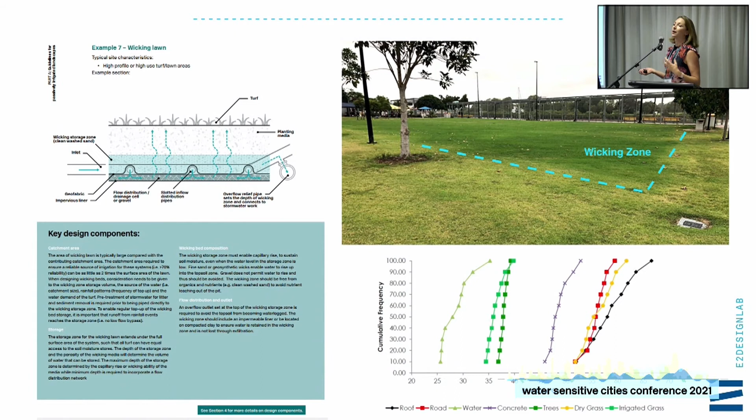In this case, just pointing out that dry grass can be as hot as a road on an extreme heat day. If you can irrigate it with alternative water sources, you get huge gains in reducing urban heat. So it's really a powerful message that we can use that research in.

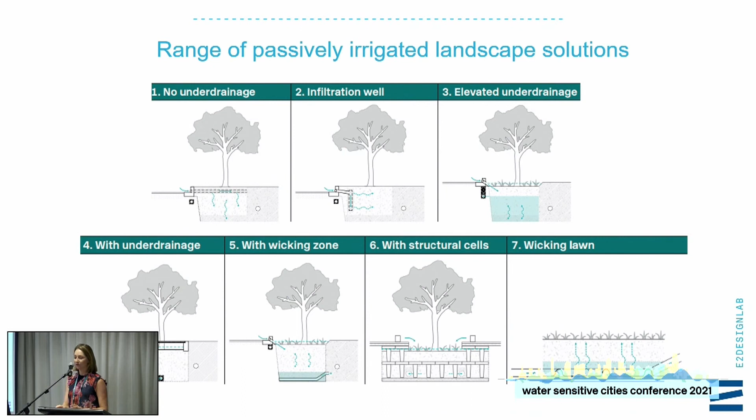These guidelines also had a whole range of different solutions so that this new technology and approaches to achieving cooler, greener cities can be applied at different site conditions and in different situations. That's just a few of the configurations that are possible.

It also has started to tailor it to different climatic regions as well. So at the back of this guideline, there's sizing guides for different climatic zones. We've got quite a few covered off in Queensland, but we also have Adelaide, Sydney, and others.

These different climatic zones are really important because we want the implementation of these kinds of technologies to be successful. So how do you size them to make sure, say, a passively watered tree isn't going to be too wet and the tree's going to drown, or too dry that it's not getting the full benefit of passive irrigation? These are tools that are now available for the industry to not only undertake and implement some of these initiatives, but to try to get it right and get really good outcomes.

In terms of application, we've come a long way, I feel, but we're still on that journey and we're going to be continuing on that journey. It's great to see so many on-ground trials of, say, passively watered trees and other infrastructure. There's going to be continued learning, and sharing that learning as an industry is really important. A reminder that best practice is a forward-moving target, and we should always be trying to get better and improved outcomes all the time and pushing the boundaries, and that's why that research and implementation is so critical.

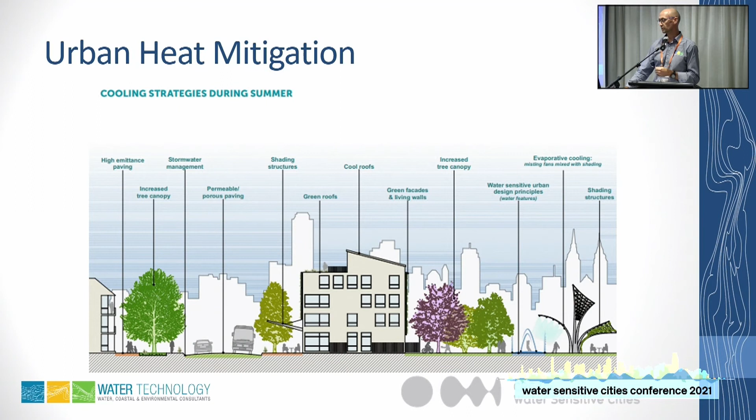So looking at the tool itself, it is a collaborative development planning tool used to rapidly visualise and compare different development scenarios. So being able to have a look at multiple different benefits and impacts, the mitigation strategies that you might be using, what are some of the planning outcomes and ideas that you need to be implementing.

They can also be used in understanding the different blue-green strategies that may be being sought, whether that be a treed landscape, street trees, could be associated with water-sensitive urban design more specifically. It is a planning support tool that can be used to understand how these different typologies that have been put forward can actually change what we're doing in that landscape.

So if you were looking at different footprints for a development, what are the outcomes associated with that? It allows you to bring in multiple different models. It's not just one model, so it's not just looking at heat, it's not just looking at water cycle, it's going to be bringing a few together. It allows for that assessment and comparison.

So the scenario tool is brought together with four main modules. Overarching is the urban development module. Sitting within that context is the extreme heat component, which is looking at extreme heat day events or sequences of events at that land surface scale. And then there is another component which is actually looking at thermal comfort.

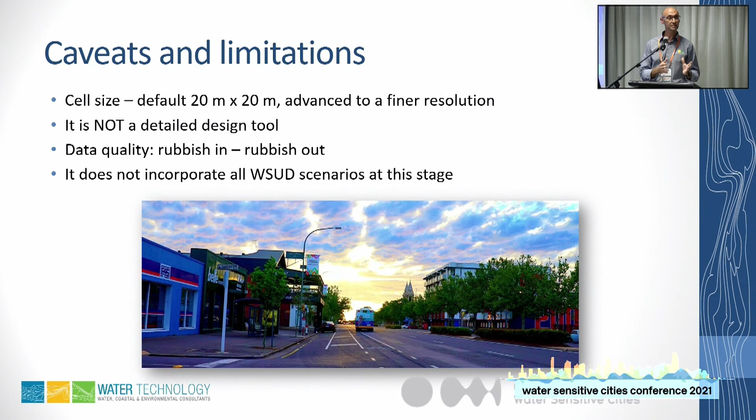From a tool perspective, some people come into that modelling space with a particular avenue that they're familiar with. In this case, for water-sensitive urban design, it's not looking at every single permutation of water-sensitive design devices, but it does have a very large suite of those that can actually be considered and implemented within a scenario.

So the process is very similar to many modelling processes, which is you use your data, you build your scenario, and then you analyse and compare those to actually understand where that's coming from.

So there's various, sorry, on my side it's actually showing... cool, I just thought I'd done something, and there's a pop-up for virus checking.

Often within many modelling projects, particularly in the urban context, it's about actually getting the right data for the right sort of question that you're trying to answer. The scenario tool actually brings in a lot of that data for you, to overlay that into your problem, which is a really good help.

So it has census data. It brings in your spatial layers and spatial elements, building footprints, land cover components, as well as your climatic data that you need to actually run these simulations. A number of those elements come through a third-party, Geoscape, and are used under licence. That information is available within the tool.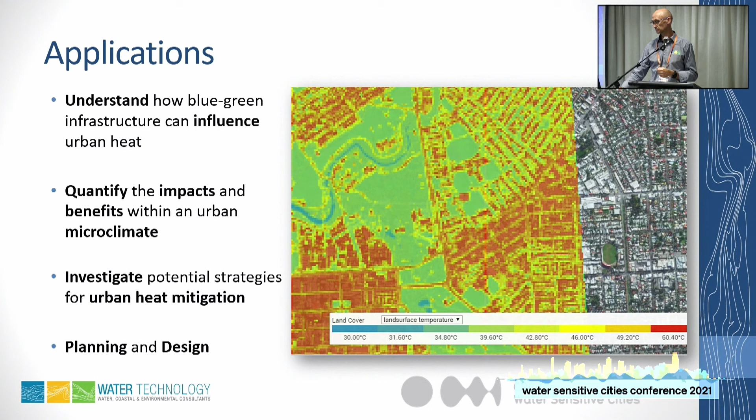And in the water cycle area, from a conceptual component, it brings in a number of tools that support understanding the individual site-specific components, but also bring together elements that help you communicate that to your audience or other stakeholders within the project.

That urban water cycle allows you to bring in multiple different water management strategies, and they can be at multiple different scales. It could be from the lot scale through to the regional and catchment scale, or in reverse - you may start from the catchment scale and want to deep dive down into the lot scale. It has that flexibility.

From a visual component, comparing and understanding differences between multiple different scenarios is something that has been set up for from the first place. You can create - there was a presentation earlier from Yafei that talked about hundreds and thousands of replications. That's the extreme end of where you can go, but even if you're looking at multiple individual projects, you can compare readily and quickly against each.

If you're looking at a business-as-usual compared to a water-sensitive city option, what are the changes? What are the impacts associated with changing the impervious cover, irrigating a surface, or introducing an increased street tree cover?

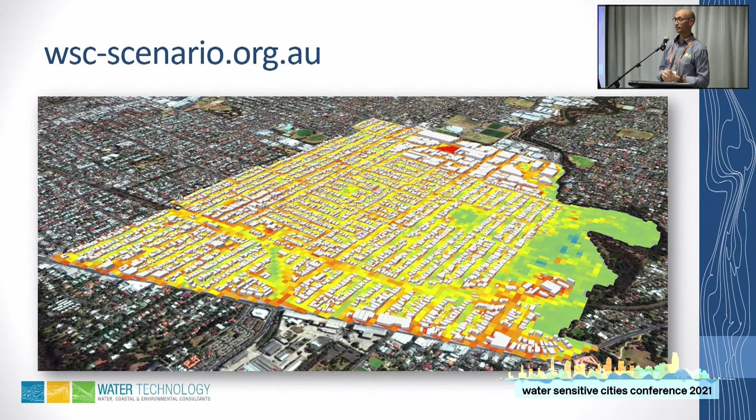My role today has really been to take the recent seminar series that Chris has run and transform that into a presentation. It covers all the workshops that encompassed the series, and translated the outcomes from those into something we could turn into diagrams and relay information in a clear manner. So I'll just start off.

The recent seminar series targeted greenfield urban settings in southeast Queensland to explore, test and implement water-sensitive city approaches. Project outcomes can be applied to all greenfield urban settings to create attractive developments that are cooler, have lower water demands, less stormwater runoff and less pollutants, and that can demonstrate strong economic benefits for applying water-sensitive city approaches.

The seminar series ran for a year. The workshops started in September 2019 and ran through to 2020. There were 4 in total, and the main aim was to inspire and engage diverse professionals across industry, to showcase the latest technology and practice, and to raise awareness for best practice water-sensitive cities design.

The first workshop, Achieving Livability for Growing Cities, had a key focus on biophysical aspects of the world's best practice water-sensitive street. Chris introduced it and got the ball rolling, then we had presentations from Rob and Luke on water-sensitive approaches at Yarrabilba.

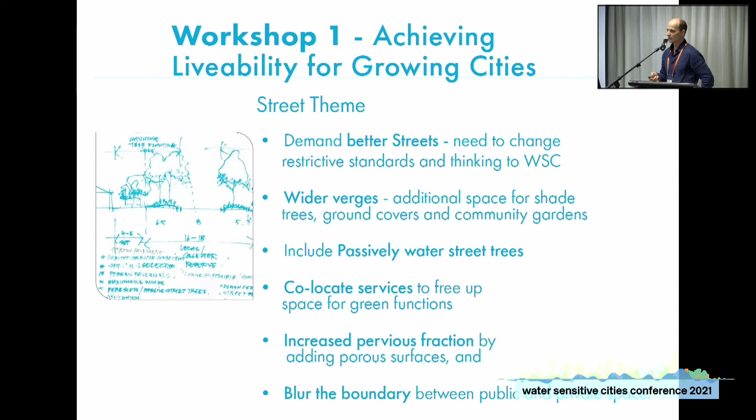This theme was common through all the workshops.

The lot group's approach was a little broader. They thought that water-sensitive city approaches need to be applied to all different types of development. Again, it's about reducing footprints to increase pervious fraction and also collect and reuse rainwater.

So the translation for a happy street was that we need to increase verge area to reduce temperatures and enhance amenity. Services need to be reconsidered to free up space for green functions. We need to convert to passively watered street trees and so on. All these things support methods that result in lower urban heat.

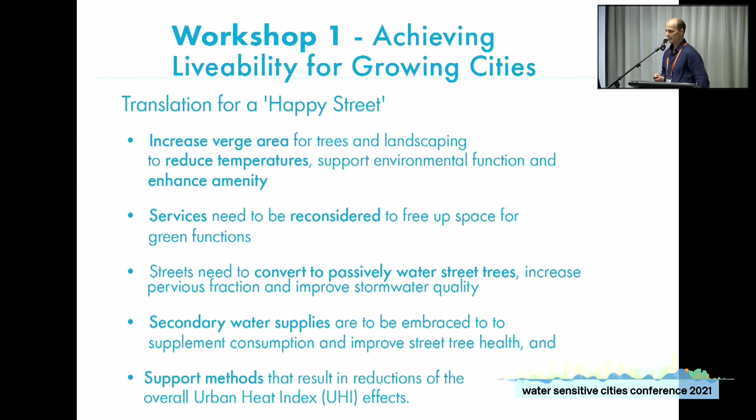Okay, moving on to the next workshop. This one was quite good because we covered a few different topics that changed people's perspectives a little bit. The presentation from Adrian Volters was great because his economic frameworks for blue and green infrastructure touched on quite a few different aspects which we don't really consider in everyday things.

And then to back that up, it was really about Reggie from Lendlease telling us about how you then sell the blue and green at the sales office at Yarrabilba.

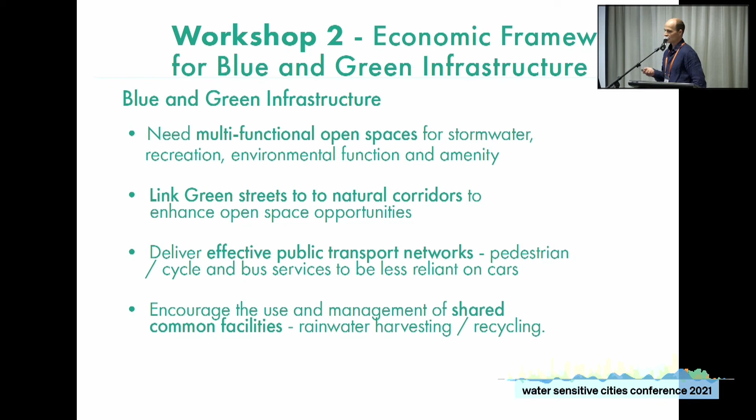So the key outcomes for blue and green infrastructure were recognising the need for multifunction open spaces for stormwater, recreation, environmental function and amenity, linking green streets to natural corridors, and then creating and delivering effective public transport networks, and also shared common facilities for rainwater harvesting and whatnot at the bigger scale.

Reggie's presentation got us thinking about what Yarrabilba is all about, and it's about affordability. It's selling green credentials for those people, through schemes such as the Green Star Communities program. But what that does is build community advocacy and reasons for people wanting to buy into a particular area and understanding what they value.

This then transitions into incentives for individual households and the potential to reduce council rates and lower running costs through various methods. The other really good thing we were introduced to from Adrian Volters was the funding schemes to deliver some of these things, with take-up from investor agencies such as superannuation companies and banks, and investor champions.

So again, what does this mean for a happy street? Yes, there's the sustainability aspect about general improvements across all the baseline categories, but then it's about building knowledge, creating good leadership examples, incentives for people to buy in, and then just expecting that to become the social norm.

Okay, into the meaty bit - this is where Workshop 3 started to translate all these things into something that we could actually design around.

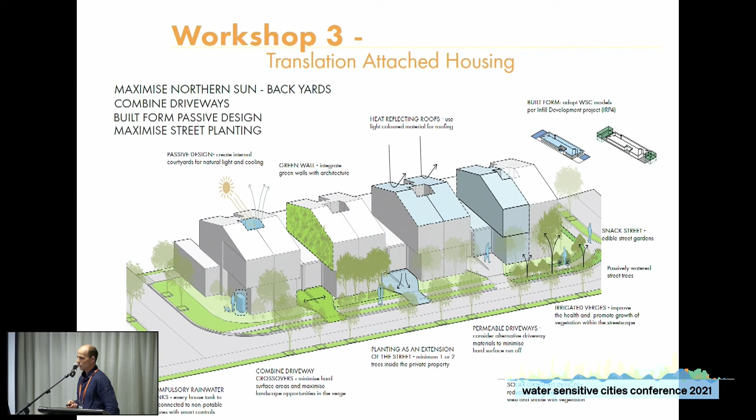I think a really good outcome we had there was combining driveways to minimise hard areas, rainwater tanks on all things, and just incorporating good passive design.

Where we went then for individual houses, which is probably important in the Yarrabilba context, is looking at both sides of the street. This is where we started to explore the use of private open space, and where that should be positioned to gain the most benefit. In this example, it's on the southern side of the street, so you're looking at the property to the front boundary, where you could possibly gain the most valuable space for the person living in that property.

What that did is, on solar orientation, the rear of the property is all dark and not that utilised, so it's about getting people into their front yards.

There's one change I would make on this diagram: the location of the footpath. I do think that should have been on the other side of the street. If people are using their front yards, you typically like to have people not looking in from the street, but that's just one thing.

Then on the northern side of the street, it's building in all that IP we've learnt previously, building backyard corridors, getting planting in the backyards, but also widening the verge in the front yard, pushing back fences to the property frontage, and drawing on that additional space which you can plant trees and maximise the water function of the street.

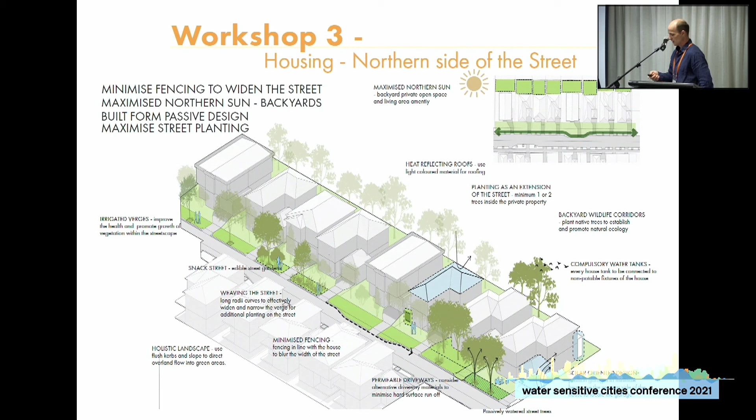Then moving on to the next group, precinct-wide outputs. This one's high-level thinking, drawing on all the usual suspects, rethinking traditional processes, linking green networks.

What this group did come up with was the idea of exploring particular streets where you could potentially widen the traditional lower-order street to enable you to connect to green spaces. So it broke up the urban form a little bit more than what was there previously, which led to better outcomes and creating environments where people would like to walk.

The next group, the streetscape group, I think the outcomes were quite interesting. We started to explore weaving the street and identifying additional surface area where you could remove the road and put in more garden and green space, and plant additional street trees. There are project examples of this already out there, but I think this really needs to be taken on board. Some of the great benefits are slowing down traffic, but also building great things for water-sensitive urban design.

So again, some diagrams about what they are. So the widened street, which was the linking street, which is the blue streets. So that's the diagram.

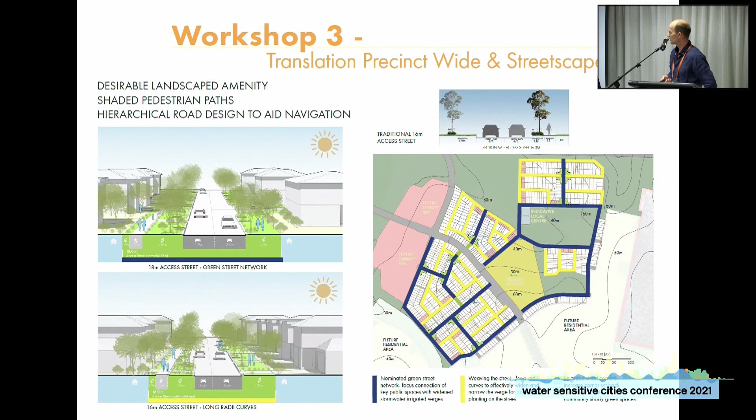And then the second example of weaving the street - what that does and how you can provide additional street coverage and reduce the sunlight onto hard surfaces, and the benefits of that.

Okay, moving on - I think this is the last example, the commercial one. This is looking at a retail format, and this is really about gaining the best site orientation and use of space, drawing on the northern sun again.

And shade to create spaces ideal for seating and using outdoor areas. And then deep planting zones to, I guess, encourage healthy tree growth.

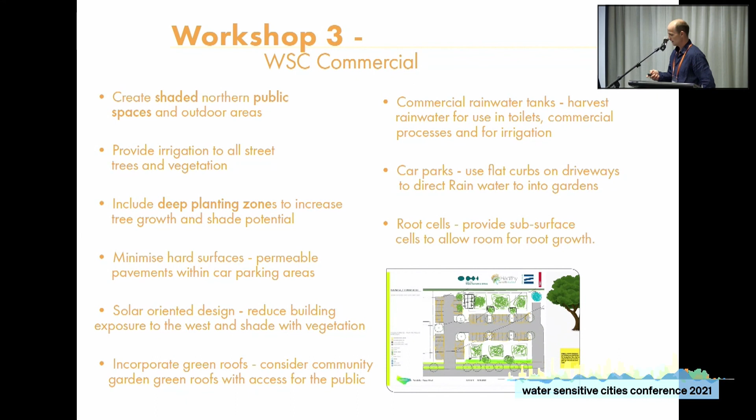Where was go there? So we also incorporated green roofs, although it's probably an expensive option, but certainly something worth investigating. Okay, so the diagram we produced for that shows the increased use of trees on the street edge, shading for that western side.

And again, emphasis around that outdoor area. We could have larger trees to shade and create amenity, and somewhere desirable to go in the heat.

And then the final workshop was really just reviewing some of those things that we had created, the diagrams. Again, Dylan took us through another iteration of that tool, and that was followed up with Kim, backing up with the economic side of what we had done.

So we reviewed the diagrams, and I guess there was a little bit of kickback from the Lendlease team saying that they didn't wish to lose that additional 2 extra metres in their streetscape for saleable area. They thought that you could basically achieve a similar outcome by improving your landscape within a street as opposed to just doing it like we've suggested.

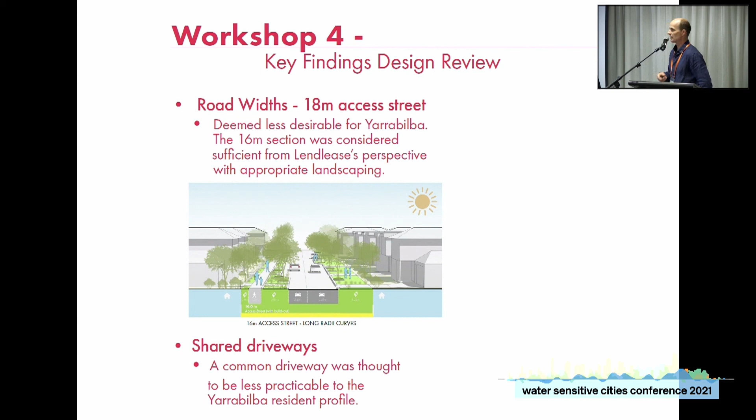The other pushback was from the shared driveway scenario. They thought that the market out there preferred to have their own independent driveway, because people were using their garages for storage and other reasons, but that's something that could be taken up in other spaces or places.

Where we went then was we spoke about the implementation pathways - how can we make some of this happen? This was more a group discussion, and we all recognised the resistance from service providers to alter current standards. However, we thought that if people got together, we could figure out ways to make common trenching and agreement to try and free up space for additional street tree planting.

We saw this as non-problematic because the street's never dug up anyhow, and modern day surveying can certainly identify where these services are all located. The great thing from Lendlease was that they were willing to put themselves out there and potentially take a pilot program on. So that's kind of where this thing may move to now, Chris.

And then finally, just the next layer on top of this is the state government's thinking around street trees and the need for them to increase their planting to every 15 metres.

And then in summary, I think Chris's statement again: a water sensitive Yarrabilba would be cooler, have lower water demands with less water runoff, with less pollutants, and there is a strong economic benefit for applying this approach. Implementation of new approaches was considered challenging, and to bring about these changes would require a whole of government approach with meaningful industry collaboration.